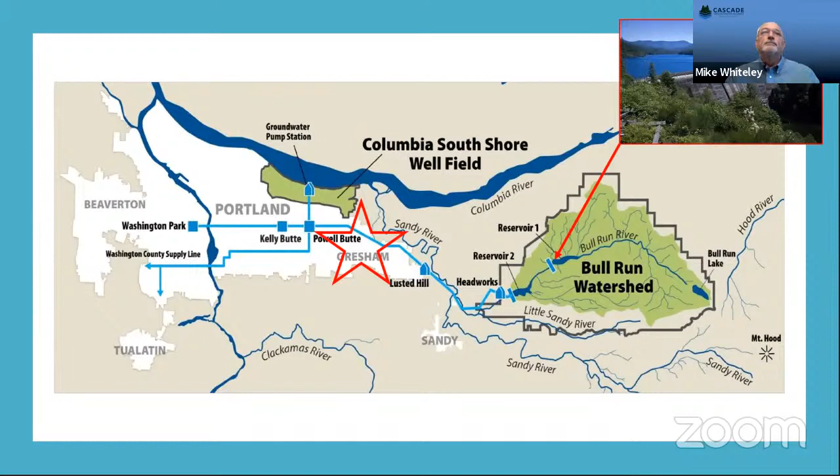Late last year, Gresham City Council approved an agreement with the Rockwood Water District to develop our shared groundwater supply and to become independent from Portland. Next slide, please.

So what makes up our Groundwater Alliance? Well, Gresham serves approximately 74,000 people, and Rockwood serves approximately 63,000 or 66,000. Rockwood actually serves about half the area within the city boundaries, and some of you may live within Gresham city boundaries but are served by Rockwood Water. Both systems are currently Portland wholesale customers, as I mentioned before.

Both Rockwood and Gresham have developed their own groundwater sources. Rockwood has 2 production wells and Gresham has 1 production well. We are both exploring several locations for future wells, which Jason will be talking about later in this presentation. In the early 2000s, Gresham and Rockwood made an agreement for Gresham to buy in to the Rockwood groundwater system. And now both agencies jointly own the reservoir, pump station, and treatment system at the Rockwood facilities.

An interesting note is that Rockwood does have a 42 million gallon per day water right. And by agreement, Rockwood has granted Gresham the use of 18 million gallons per day of that water right. The 42 million gallons per day will be enough capacity to serve both systems far into the future.

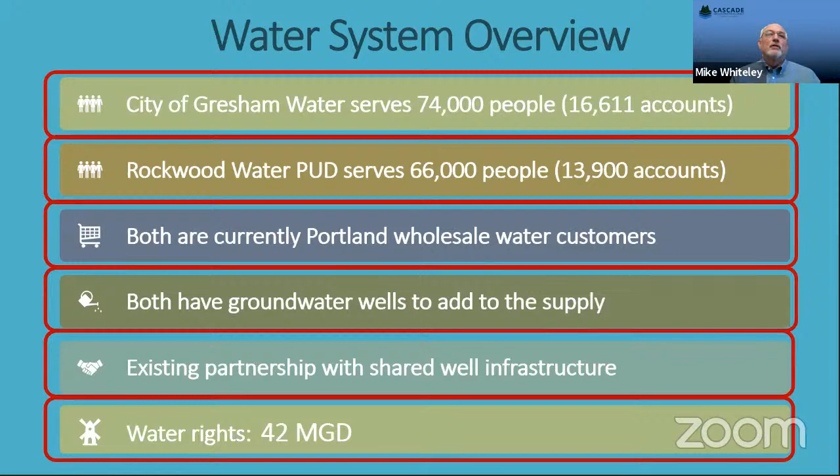Next slide. So now let's compare the options of staying on Portland or developing our shared groundwater facility. First, let's talk about continuing with Portland. As I said before, wholesale water rates are expected to more than triple by 2030. Portland's system also has some aging infrastructure, which to date has not shown the need for replacement, but when and if it does, it's going to be very costly to replace. Due to the cost of the water treatment plant and future expenses to operate the Bull Run system, our systems, Gresham and Rockwood, will see higher long-term water rates.

Looking at our independent groundwater supply, one of the nice things we have lately is that Gresham and Rockwood have been accepted to apply for an EPA loan with very good terms, including interest rates and payback timeline. This is going to allow the city and the district to keep rates much lower than had we stayed as a wholesale customer. Because we will have groundwater wells throughout the city and have redundant transmission mains, the groundwater system will become more seismically resilient. The Bull Run system is also more vulnerable to forest fires and potentially even volcanic activity.

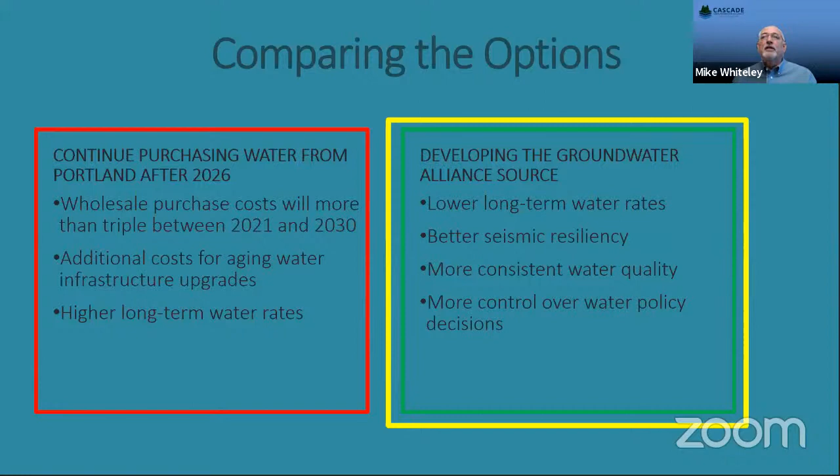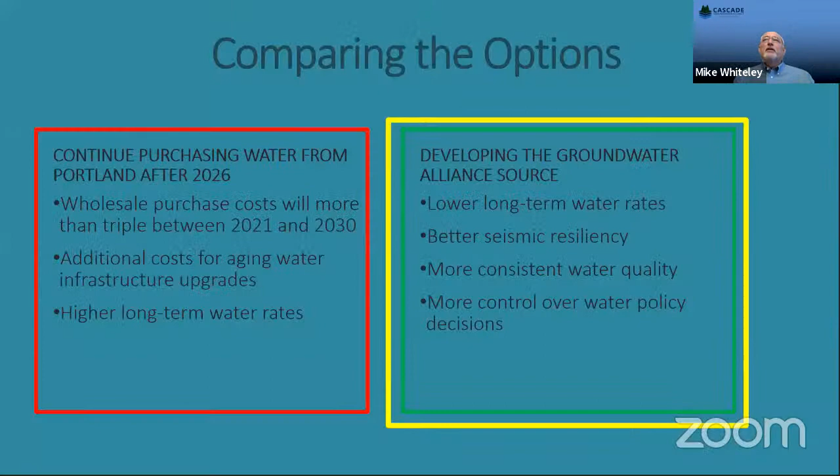Another benefit is having our own water source will allow for more local control. Right now, wholesale customers may give recommendations. However, ultimately, Portland is the final decision maker in how they operate, treat, and manage their water supply. Additionally, having our own source of supply will add resiliency to the whole region. If we have water to spare, we can help other agencies in our region. So I'm now going to turn it over to Kari to discuss our groundwater source.

Thank you, Mike. All right, I'm going to take some time to provide background on what groundwater is, how it gets there, and why our groundwater source is such an excellent choice for our communities. Groundwater is water that fills the spaces between soil particles and fractured rock in geological formations beneath the ground's surface. Although we never see it, groundwater accounts for 99% of the world's liquid fresh water, and about half of the US population drinks groundwater.

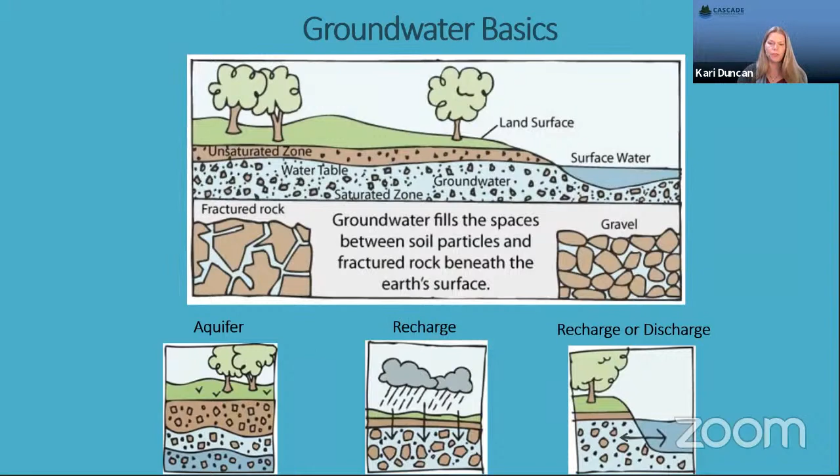An aquifer is a water-bearing formation that has enough connected spaces to allow groundwater to flow to wells or springs. Aquifers can be replenished, recharged by rain, snowmelt, and surface water bodies, like some of the images you see here. And depending on local conditions, which I'll talk about in a little bit, an aquifer might discharge to surface water, or it might recharge from surface water. Can I have the next slide? Oh, there it is, thanks.

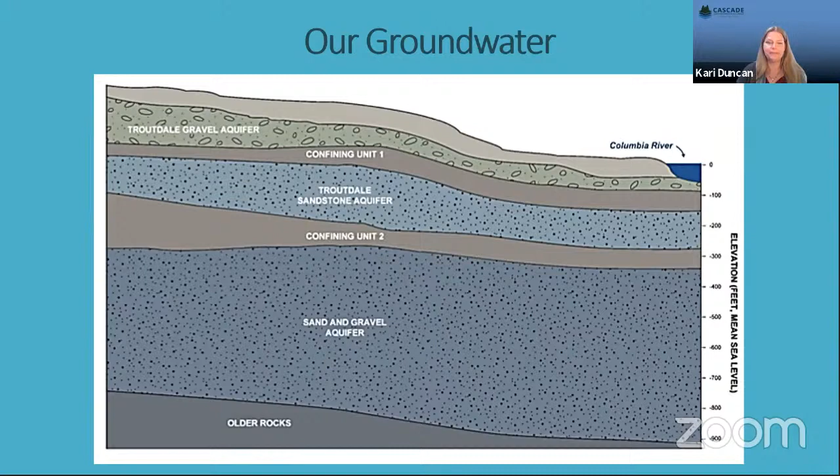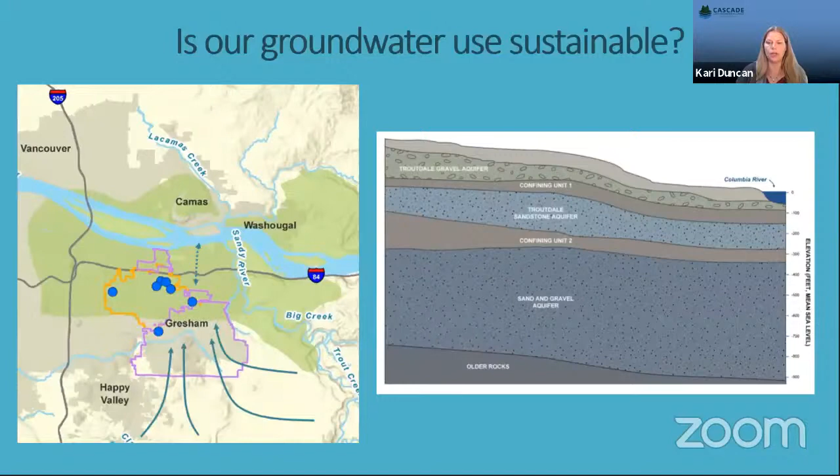Under pumping conditions, the SGA can also receive recharge from the direction of the Columbia River in areas where confining units are thin or absent, such as near Blue Lake. The recharge from the Columbia River maintains the aquifer so that ambient groundwater levels don't drop below the river level. So this helps that aquifer remain charged at all times. Next slide.

Okay, so is our groundwater safe from contamination? The SGA, sand and gravel aquifer, is naturally protected from contamination. First, the basin sediments function as a natural filter. They remove particulate contaminants and microbes, such as bacteria and pathogens that are common in surface water. Second, many of the most common surface contaminants from industry and stormwater actually bind to the organic matter in surface soils. Finally, the confining units are effective barriers to flow from above.

This is important. Each confining unit is 50 to 200 feet thick across our service areas, making the sand and gravel aquifer the least vulnerable aquifer in the basin. This is a very protected layer and a very protected water resource.

In addition to these natural protections, our Wellhead Protection Program works with local businesses to reduce the risk of contamination from spills or waste disposal. And I'm very proud to say that the Wellhead Protection Program, which Gresham and Rockwood jointly sponsor, just won a national award from the American Water Works Association. It's a very excellent program. Next slide.

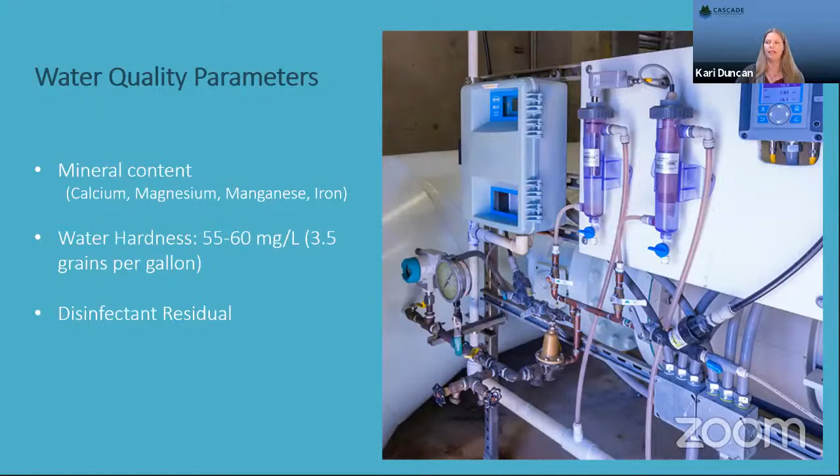Go ahead and turn to the next. Thank you.

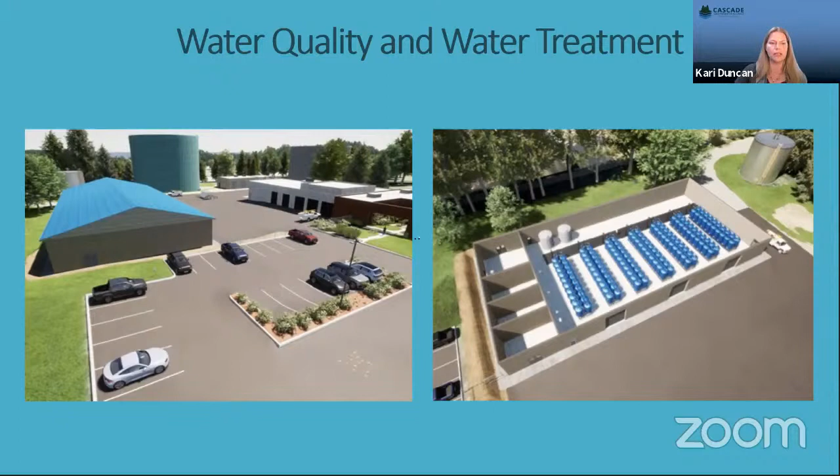So as part of our project, we are going to be installing a water treatment plant. These treatment systems are specialized just for the manganese and iron in the water. They help to remove those components. This is an image of our site, and the building in the left image is a building of the new treatment system. You can see the image to the right has that system with the roof off, and the blue cylinders are filters, which are designed to remove manganese from the water. That will help the water to not have some taste issues, as well as aesthetic issues that sometimes occur with groundwater. Next slide.

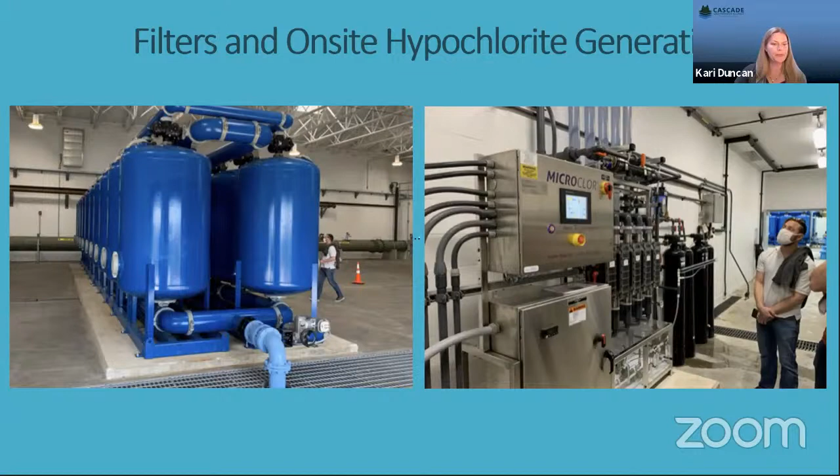This is a picture of an operating treatment plant similar to what we have. This is from Clark County PUD. These are the manganese filters in the blue, and to the right is an on-site chlorine generation system, which is part of that treatment process. Next slide.

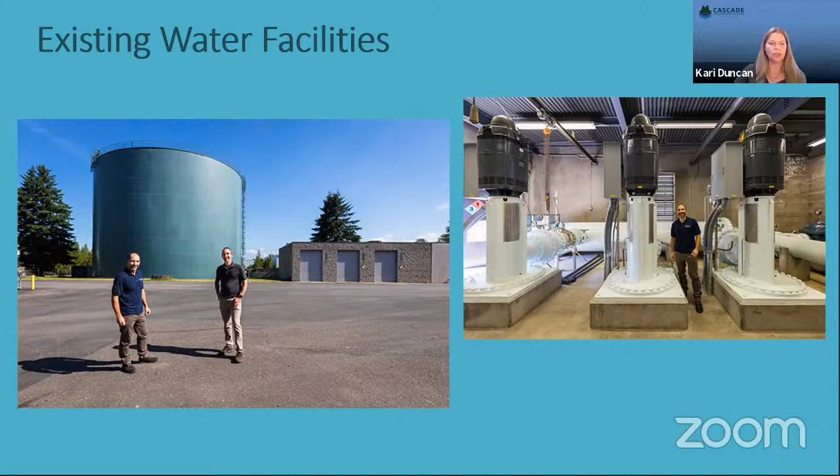This is just a couple of images from our system. This is our current Cascade water reservoir, as well as a pump station. Some of this is equipment similar to what we will be building and expanding as part of our project. And now I'm going to pass this on to Jason Brandstetter, Senior Water Engineer with City of Gresham, to talk about the design and construction project.

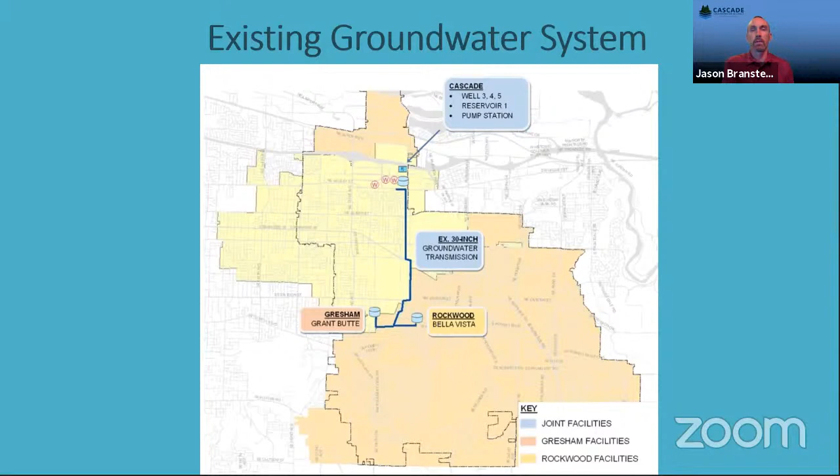Moving on, we'll talk a little bit about the existing groundwater system that's jointly operated by the City of Gresham and Rockwood Water District. Since about 2008, 2009, we've had 3 wells. Wells number 3 and 4 are located at the Rockwood Water District offices, and Cascade well number 5 is located at fire station number 74. Those 3 wells all pump back for treatment at Rockwood's district offices and then are delivered down the 30-inch groundwater transmission main that's connected to Rockwood's Bella Vista Reservoir and Gresham's Grant Butte Reservoir. This system is capable of delivering about 13 million gallons a day that's jointly shared between the 2 utilities. The primary restriction in the existing system is the capacity of that 30-inch groundwater transmission main. Next slide.

So one of the key pieces of our future construction will be to construct an additional groundwater transmission pipeline that will allow us to significantly increase the capacity of our groundwater system. Additionally, we'll be drilling 2 additional wells, which will pump back to the central treatment facilities at the Rockwood District offices. And then we'll have 2 to 3 additional satellite well and treatment facilities, which will pump into the rest of the system. Coming back to the central system, the secondary groundwater transmission main will also deliver water to the Rockwood Bella Vista tank and the Gresham Grant Butte tank.

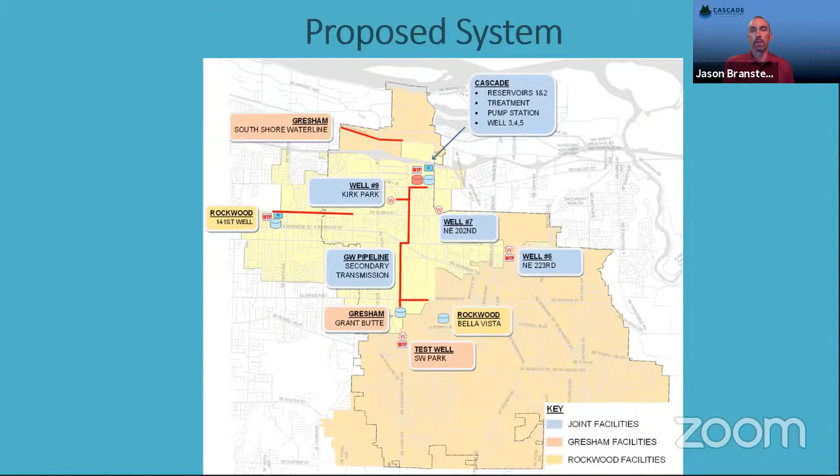Next slide, please. So in our work over the past year, we've completed some significant well drilling in anticipation of expanding the Cascade groundwater system. Cascade well number 7 at the 202nd site was completed, as well as the Cascade 9 drilling at Kirk Park. Rockwood also completed drilling of its groundwater well at its 141st site. And then the test well was completed at Gresham's Southwest Community Park site.

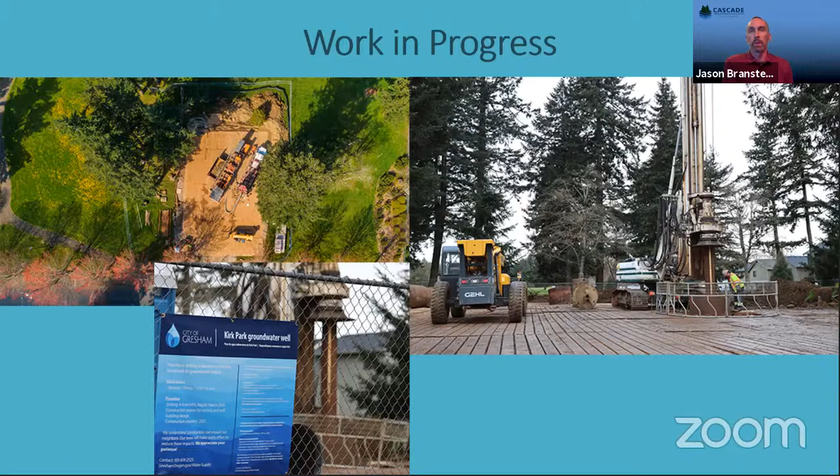So next phases in our construction, we're just kicking off the construction of three major components of the expanded groundwater system. The construction of the new Cascade Reservoir number 2, which is a 6 million gallon pre-stressed concrete reservoir that'll be built at the Rockwood District offices. We're starting the construction on the well house for the Cascade well number 7, and then the pipelines which will connect Cascade well 7 back to Rockwood's district offices, and the initial portion of that secondary groundwater transmission main.

So ultimately, when the system is all built out before 2025, we will have 8 total wells, up to 3 independent treatment sites, and we'll have expanded that existing system to a capacity of more than 25 million gallons per day, which will be more than enough to supply the demands of both Gresham and Rockwood.

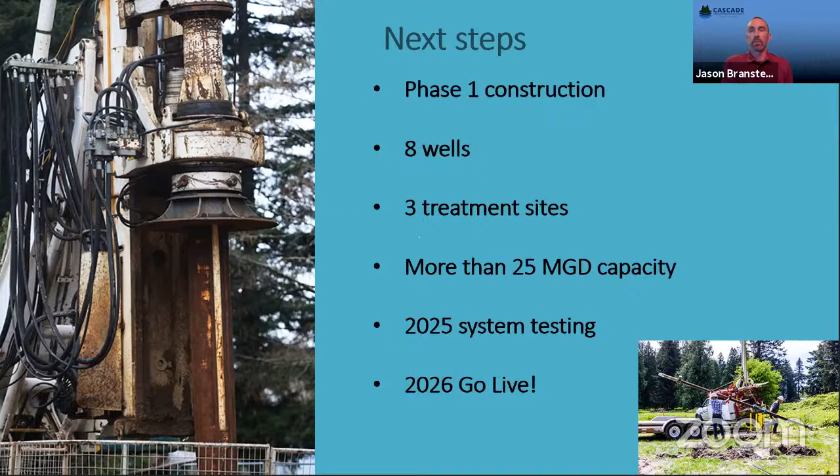We are planning our construction to have everything complete and ready to be fully tested in the summer of 2025, completely ready to go live and be operational in 2026, when we'll be ready to get off of our connection from the city of Portland. And with that, I'll turn it back over to Tam for a summary and questions.

Great, thank you, Jason. I want to thank our panelists, Mike, Carrie, and Jason. We appreciate your overview. You did a great job of presenting some technical information to our audience. I'd like to recap some highlights from your presentation. A big one, that this project will take over the next 5 years to complete the expansion of our groundwater system. So we're looking at 2026.

A fact there, and several of our presenters touched on this. Did you know that Gresham and Rockwood already are drinking groundwater? And we are at about 15 to 30% blended with Portland water during our peak summer demand when we have a lot of water usage.

We're committed here to delivering you all groundwater that is safe, groundwater that is reliable, and groundwater that is a more affordable option for our community. And that's why we're pursuing this Cascade Groundwater Alliance. Also of note is that this is a historic partnership, this Cascade Groundwater Alliance, and we are going to deliver all of those benefits to you, our customer.

So with that, I'm going to give you a little time check. I think we are right at 6:30, and we're going to go into our question and answer session. As Jason mentioned, there is a chat feature in YouTube where you can type in any of your questions. We have questions we received in advance of our presentation, which we asked for when we advertised, and we also have received some questions from our viewers. And so I'm going to deliver our first question and pose it to our panelists.